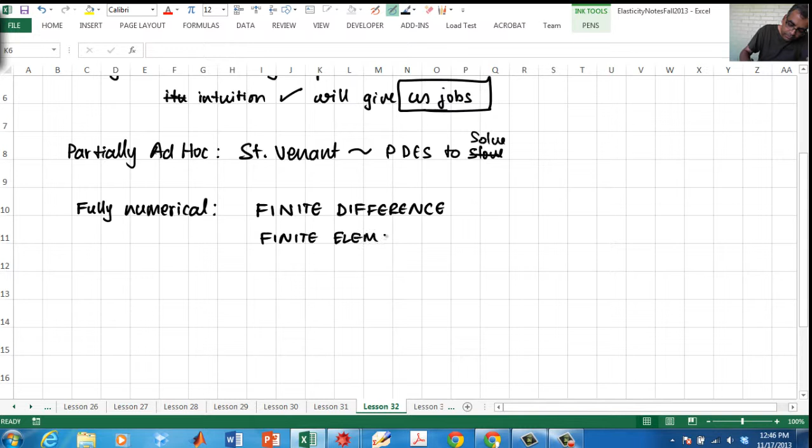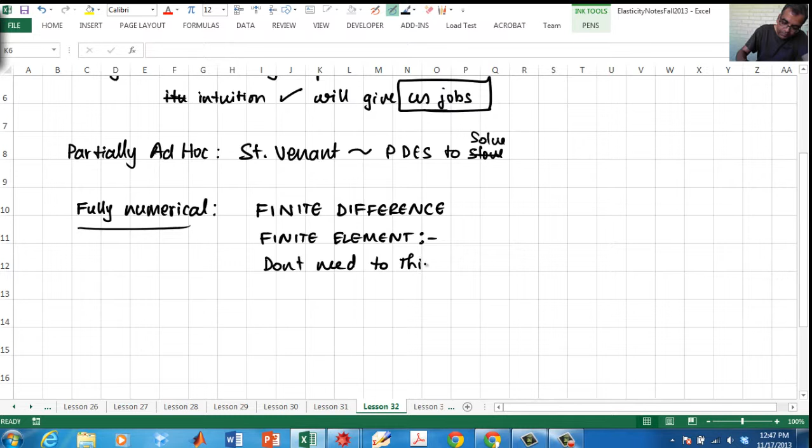etc. So right now we have the hegemony of the finite element scheme to the extent that people actually think that mechanics means finite element. That's actually not true. Okay, finite elements is a small area of mechanics which has some practical use for finding fully numerical solutions. So it has some very good advantages. Don't need to think. Okay, well, it's not really true, but I'm just telling you.

Okay, so what it means is that you are replaceable. And you're hoping that by that you will get promoted. You know what I mean? If you're irreplaceable, you will not be promoted. So it's a bad thing. So my point is, okay, fine.

You know what? If you do a fully finite element method, you think it's magic. You press a button, you get some color pictures, and answers are all fine. But you cannot do parametric studies. So it takes too long. And the answer from many people is to just say, buy a big enough computer. I mean, that's a waste of resources.

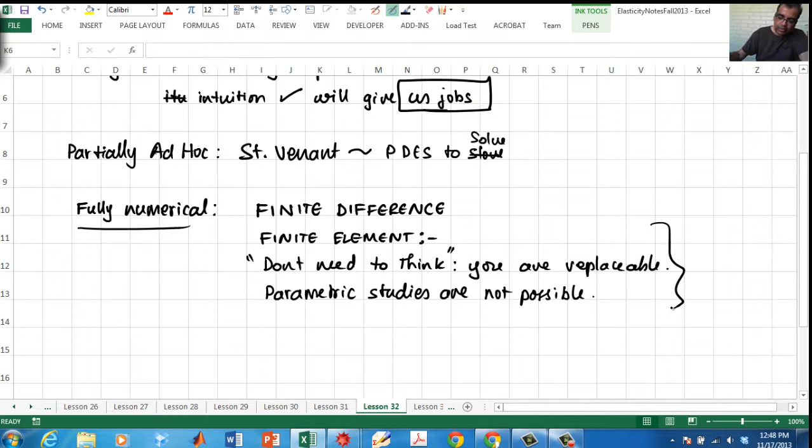And that's again one of those things which at a high level, you have to ask yourself, do you really need it? It's like saying, in order to kill a fly, what I need is a flamethrower. Yes, it will kill a fly, but it will kill also everything else around it. So, you gotta match your tool for the task. Okay, so that's a crazy thing to do. But that's what we are doing right now. So please remember that these kinds of things are fully numerical schemes.

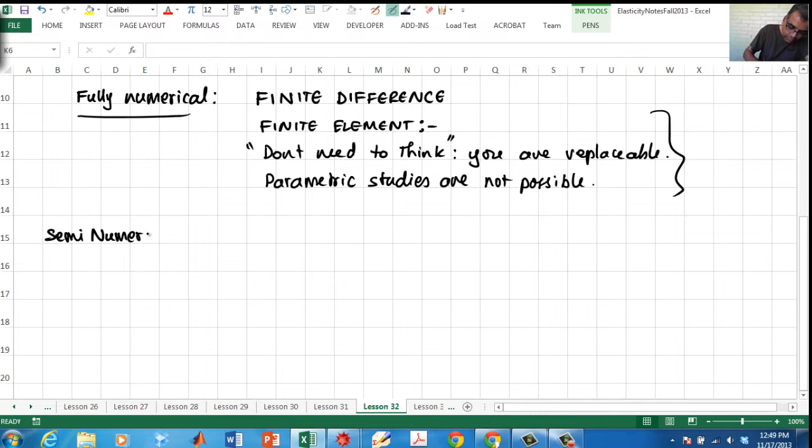Now, there are a whole bunch of things which are called semi-numerical, or semi-analytical. This uses symbolic manipulation plus numerics. This is somewhat new because symbolic manipulators, like Mathematica, Maple and other things, are still being used primarily as small tools in engineering classrooms. We have to use it much larger, and I will show you that symbolic manipulators are very good for doing certain things.

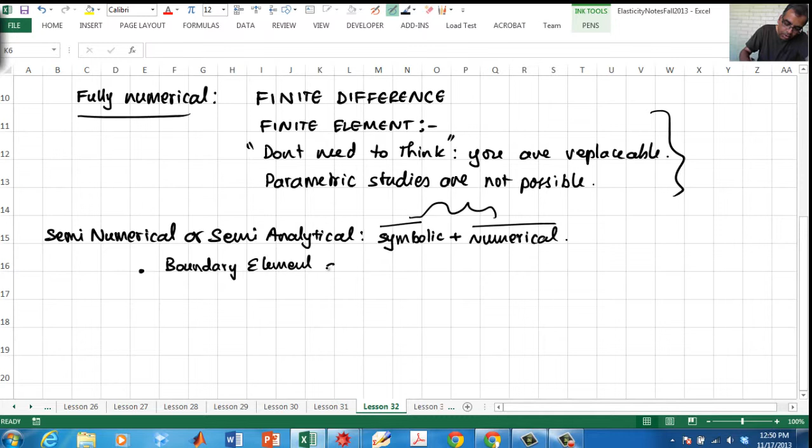But you cannot do everything. It cannot give you exact solutions for everything. People do entirely symbolic or entirely numerical. I am thinking you can do something together. Okay, so there's already one method that does that. These are called boundary element methods, or Green's function methods. And they work by doing exact solution for point load, and then approximating.

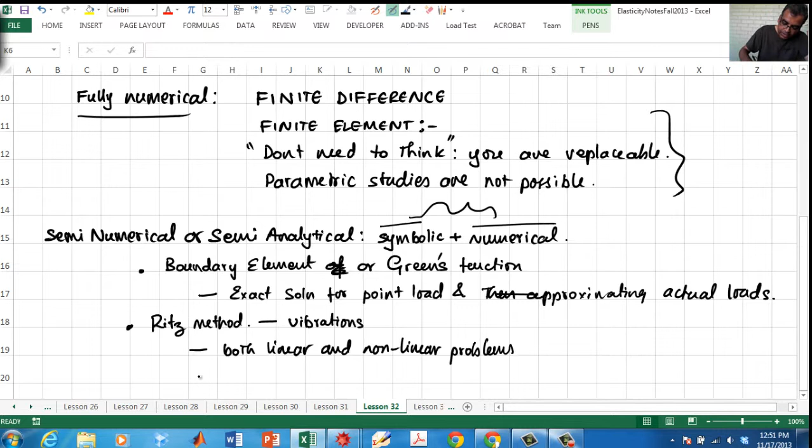So this is one, and the second method, which is what I am going to talk about and which is again very popular, is called the Ritz method. And this is actually very popular in the vibrations community. And this works for both linear and nonlinear problems. This is quite good. The thing is, it requires judgment. And by the way, this method predates finite elements, all of these things. This is a very old method. Many times it's called the Rayleigh-Ritz method.

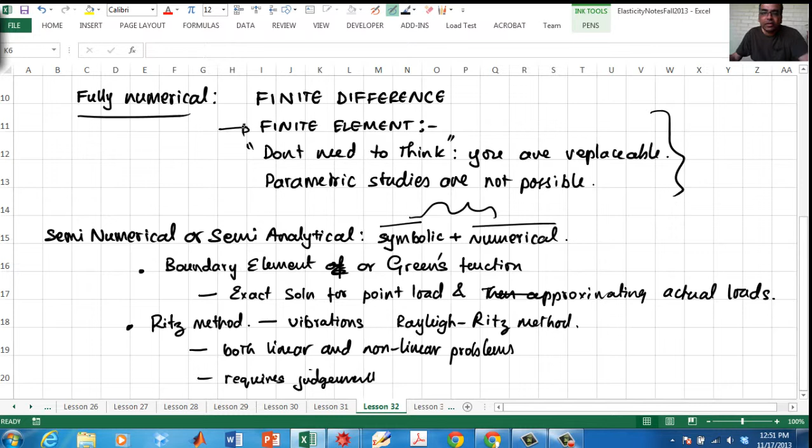And I'm going to show you how to use that, just to introduce you to it, so that you realize, no, not everything needs this. Don't blindly go to this kind of thing. Use your brain so that you can earn your keep. Otherwise what happens is, after a short time, they will say, why are we hiring you? So how does this Ritz method work?

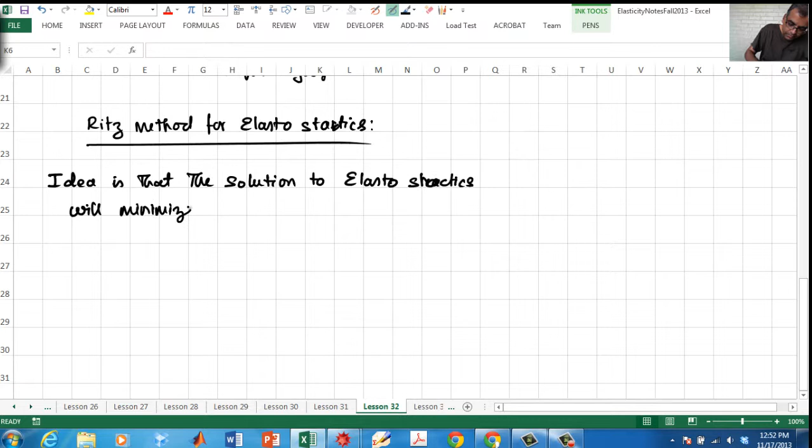So for elastostatics, how does it work? Step 1. Before I do step 1, let me back up a little bit. I want to do something slightly different. The idea is that the solution to elastostatics will minimize the strain energy.

Among all KADs. Remember what's a KAD? Kinematically admissible displacements, right? So what does it mean? Find u_i that minimizes the integral of 1/2 C_ijkl epsilon_ij epsilon_kl over the whole body, minus the integral over the traction boundary, only traction boundary conditions, of T dotted with u dA. Remember this, right? So this was the energy, and find things that minimize this.

That's the idea. So approximate solutions will do an approximate minimum. What do I mean by approximate minimum? We are not going to minimize over all possible KADs, only over a parameterized subset. That's it. What do I mean by this? I'm going to talk about the general procedure, then we'll look at a particular example.

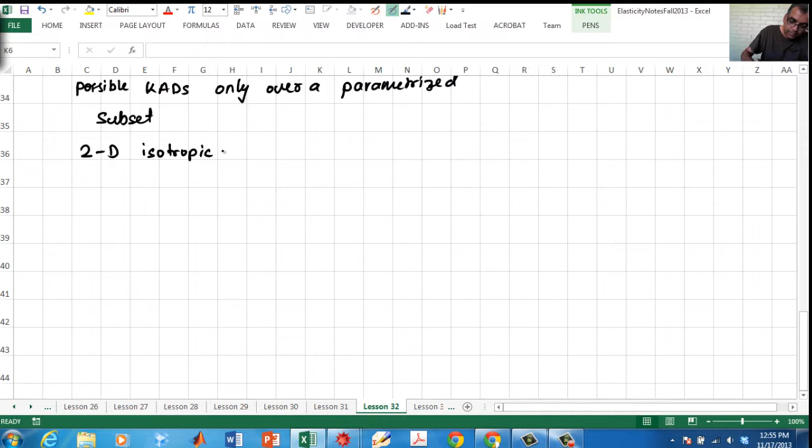Okay, general procedure. So we are going to do 2D isotropic elasticity. The idea is the following: u of x, y equals summation u_i f_i of x, y. These are known functions. v of x, y equals summation v_i g_i of x, y. Again, these are known functions. These are unknown constants.

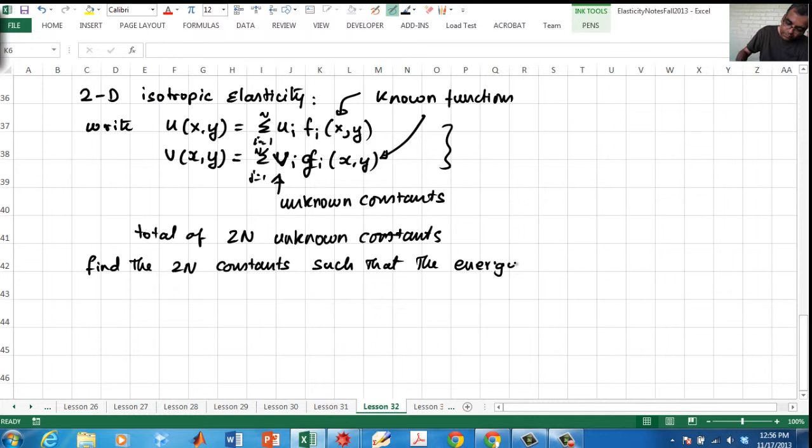So i equal to 1 to n, j equal to 1 to n. So how many unknown constants? A total of 2n unknown constants. So our task is to find the 2n constants such that the energy is minimized. We have to make sure that it has to be KAD. You cannot pick the f_i's to be anything you want. It has to be a kinematically admissible displacement, otherwise it will not work.

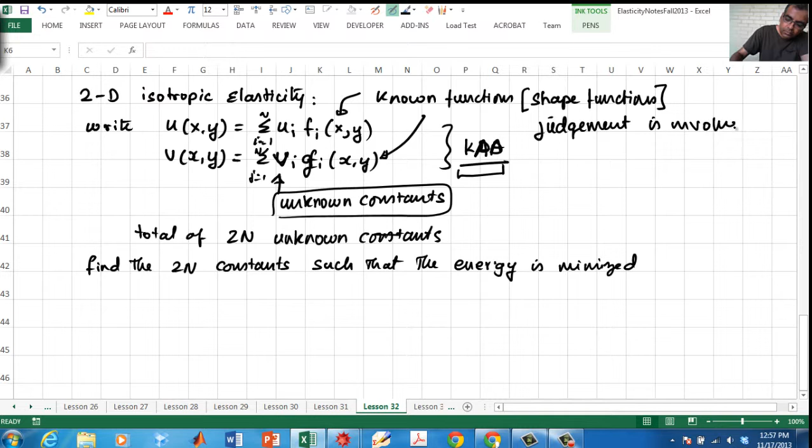So rather than looking at all possible things, we are going to look at only some possible kinematically admissible displacements. These are usually called shape functions. These are known a priori, and there is nothing which says you have to pick polynomials or anything. Pick whatever you like, which you think is reasonable. So judgment is involved. Okay, so how do we do this? I'm going to show by example.

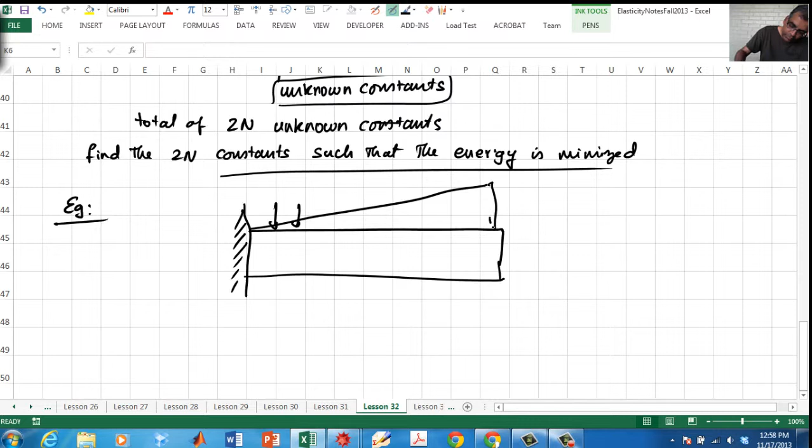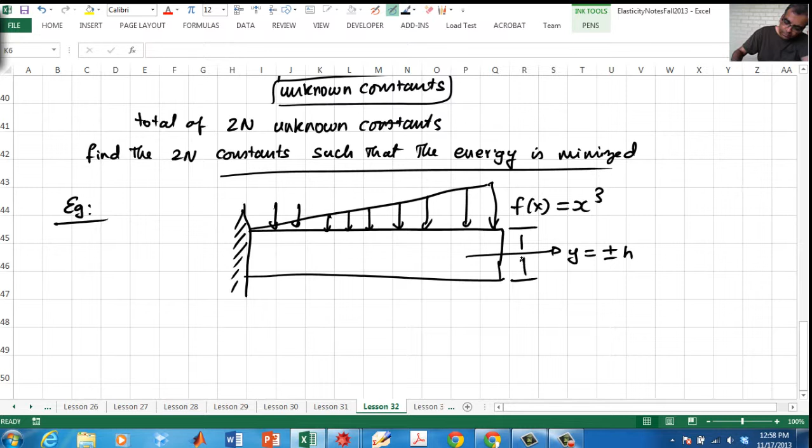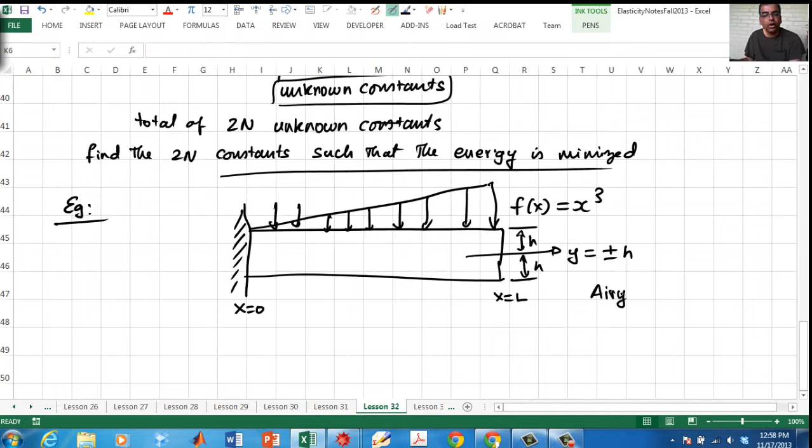I have a cantilever beam, and then I have a force distribution that is cubic, and I want to find out the displacement. y equals plus or minus h, and x equals 0, x equals L. I want to be able to do this symbolically, and this is a square cross section. I can do it by Airy function. We know how to do that, but I don't want to do that. I want to show you how to do approximation.

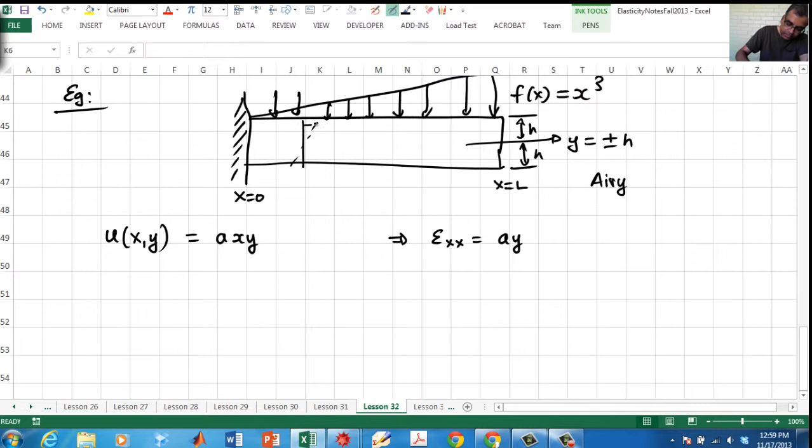So you say, okay, fine, I'm going to assume u of x, y equals a x y. You're wondering, how did I know that? Because this means epsilon_xx is a times y, and I am assuming that the strains are linear. v of x, y equals a0 plus a1 x squared plus a2 x cubed. Sorry, we'll call this a3, a1, a2.

So notice this. Why did I assume this? Because roughly speaking, if I have a cantilever beam, I will get a cubic dependence. PL cubed over 3EI is the deflection, and also I am assuming no variation in the y deflection through the thickness. If you say, oh my goodness, how am I going to do it? Well, this is what you get paid for, my friends. The ability to come up with ideas, pictures for these things. So this is a good assumption based on cantilever beams.

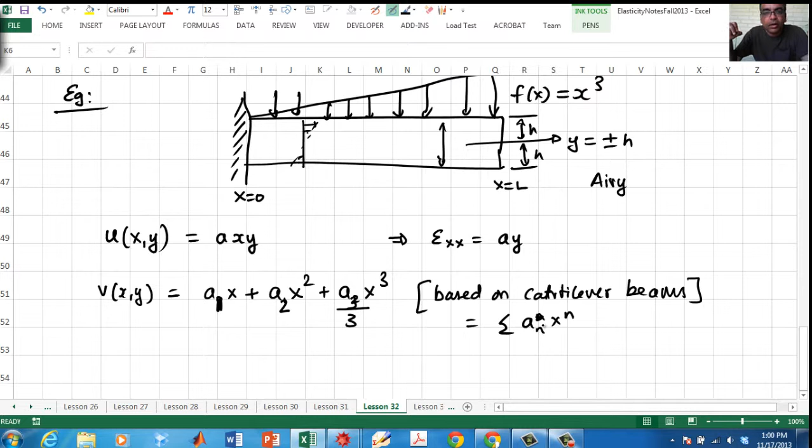You can do something else. I mean, there's nothing, for example, you can do, okay, fine, I don't know what to do. I'll put an x to the n and put n equal to 1 to 7 or 1 to 5 or whatever you want. I'll tell you a little bit later how to pick something a little bit better than this. Okay, right now, so what it is, find these four constants.

So the problem reduces to, instead of finding u of x comma y and v of x comma y, we just need to find a, a1, a2, a3. These four constants. Okay, and I'm going to make my life a little bit easier also. So that's step one. So this is my assumption.

This is the f of x comma y. These three things are the g of x comma y, the shape functions. Roughly speaking, the shape is determined by those functions. So if you pick different shapes, I'll get different possible shapes for the beam. That's how it works. And there are only four constants. Now what I want to do is to say, given these four constants, let us calculate the strain.

Epsilon 11 is du dx, which turns out to be a times y. Epsilon 22 equal to dv dy, which turns out to be 0, right? Because there is no function of y. Epsilon 12 equal to 1 half du dy plus dv dx. So let's do it that way.

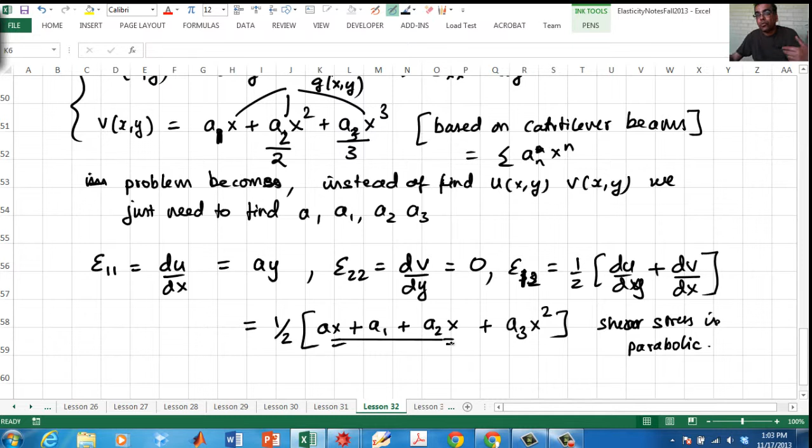So I want to get rid of the x term. You don't have to do it, but I don't want to do a lot of calculation. What I'm trying to tell you is, the more insight you have about stress distributions, the better you will get at picking the functions and simplifying your life. In this particular case, I'm going to say, a plus a2 times x term, I want it to be 0, so that it's only parabolic. You can see a1 and a3x squared.

Let's not take it too seriously, you know what I mean? This is a crude idea. So what happens is I will get a2 equal to minus a. So I got rid of at least one of the constants. So I got a2, a3. Okay. So next, I want to calculate the strain energy.

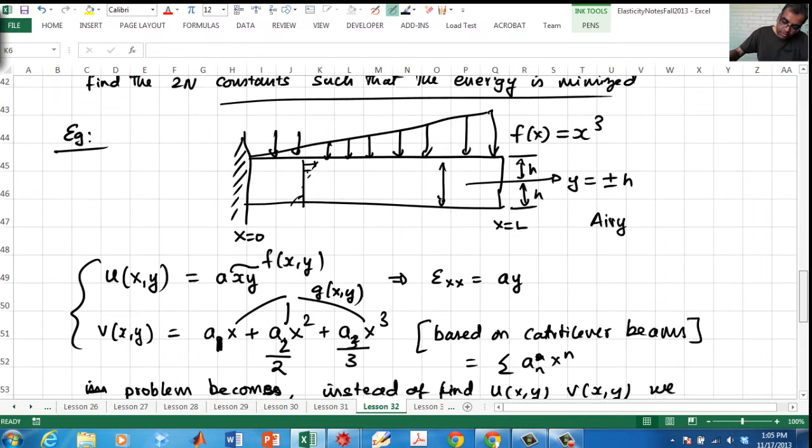U equals integral, if you remember, 1/2 lambda epsilon ii epsilon kk plus 2 mu epsilon ij epsilon ij dx dy. So this is a double integral, goes from minus h to h, 0 to L, minus the boundary integral. So remember, that's only this. f of x there is x cubed, so I'm going to put minus x cubed, and then v of x comma h dx. So y is h.

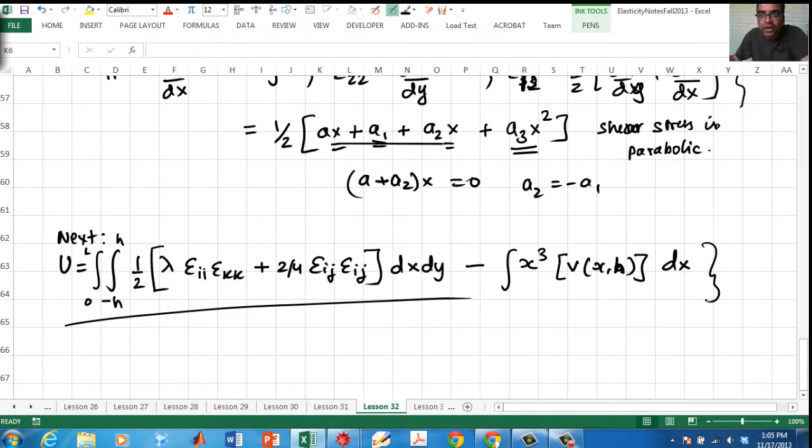Okay, now you have to do this, and this is a pain. Even calculating these things is a pain, and then it starts really getting painful here. This integral, if you use simple enough functions, you can actually do using Mathematica or something, which is what I am going to do. I am going to show you what it will look like if I use Mathematica for this. Okay, let's see. I'm going to shrink it so that both of them can fit.

Okay, so I'm going to shrink it here. I'm going to show you the Mathematica side of it. Okay, first thing I do is I have u and v. u is a times xy, v is a1 x minus a2 over 2 x squared. I mean a, because a2 was minus a, so it is minus a over 2 x squared plus a3 over 3 x cubed. So the constants are this, this, and this. So there are only 3 unknowns. I have to get 3 equations. So we'll see how it goes.

So I'm going to say shift enter. So now I have plugged in u and v. Now look, strain epsilon 11 is du/dx, epsilon 22 is dv/dy, epsilon 12 is 1/2 du/dy plus dv/dx. Okay, and the energy is 1/2 lambda times epsilon 11 plus epsilon 22 squared, that is this term, epsilon ii epsilon kk, plus 2 mu times epsilon 11 squared plus epsilon 22 squared plus epsilon 12 squared. Sorry, there should be a 2 here because there are both epsilon 12 and epsilon 21. Okay, so let's see what we'll get.

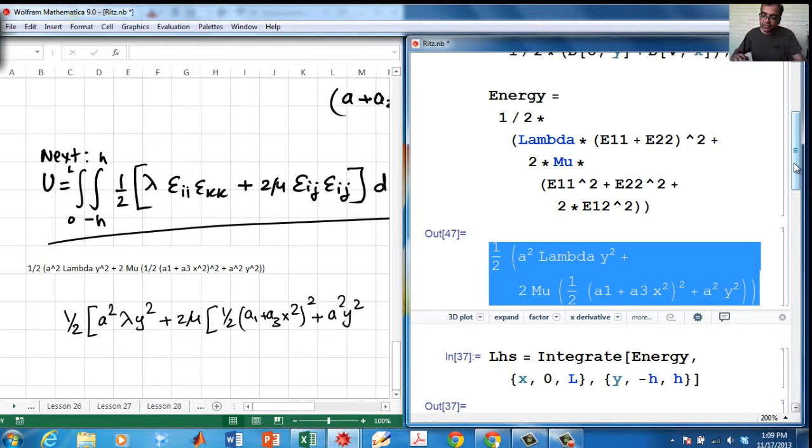Okay, so now what I want to do is integrate this thing. There, left hand side is integrate the energy from x equal to 0 to L and y equal to minus h to h. So I am doing this thing. Okay, so off we go. I'm going to go up here and I'm going to say, there you go. I got a messy thing, but that's okay. Okay, so I'm going to write this.

Let's see. 1 over 15 hL times 15 a1 squared plus 10 a1 a3 L squared plus 3 a3 squared L fourth. I'm just writing it down. You don't have to do it. I'm just showing you what you will get. Okay. That whole thing times mu plus 5 a squared h squared times lambda plus 2 mu. That's the energy. This thing, U. And I'm calling it the LHS because I'm going to soon show you what happens.

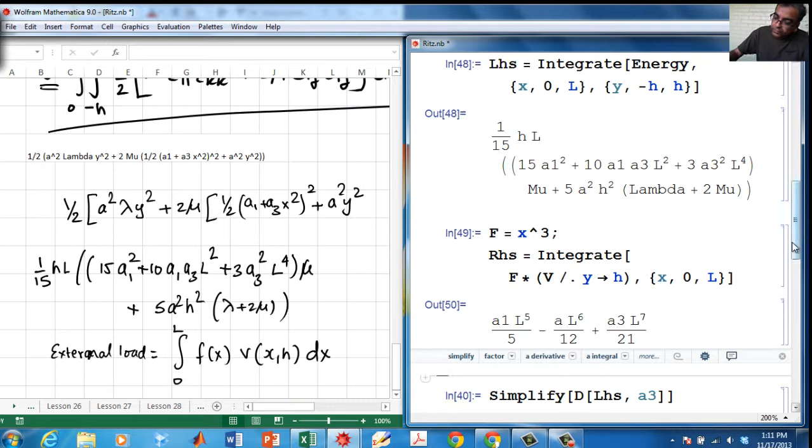So if I do that, I will get there. So this whole thing turns out to be a1 L to the 5 over 5 minus a L to the 6 over 12 plus a3 L to the 7 over 21. So what is my energy now? Total energy U, which is a function of a1, a2, sorry, there is no a2, a and a3. These are the three things, right? Equals all this junk 1 over 15 hL times all this junk minus a1 L to the 5 over 5 minus a L to the 6 over 12 plus a3 L to the 7 over 21. Notice, instead of being a function of ux and uy, it's now a function of just three variables.

Now I want to say find a1, a, a3 that minimizes U. How do I do that? I do partial U with respect to a1 equal to 0, which means this. So let's go up here and I want to say there are two pieces. I have to do this and that. I am going to do both of them. a1, a1. There, it tells me. Of course I could have done that by hand, no? But I'm just going to show you.

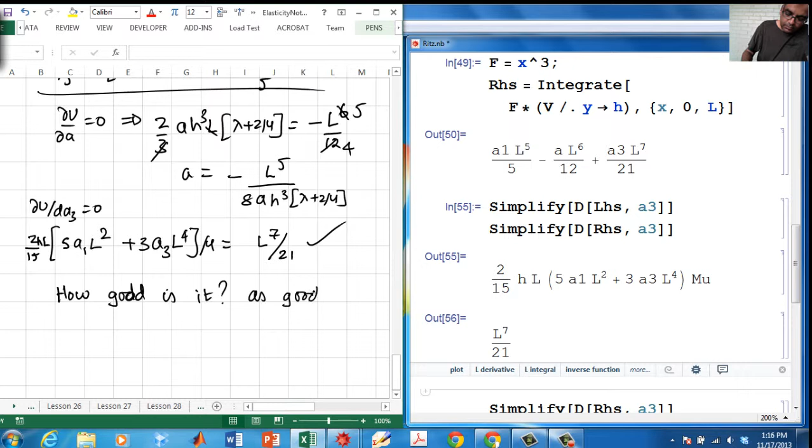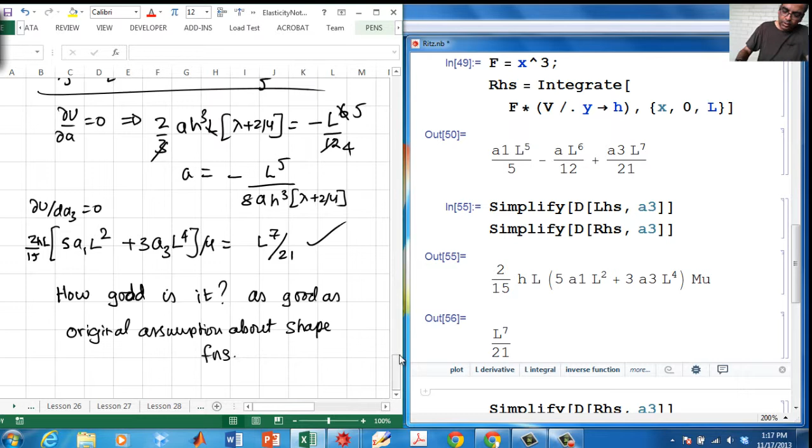How good is it? It is as good as the original assumption about shape functions. What do I mean? Everything depends upon this. So if this is a reasonable approximation and you have enough flexible parameters, you will get a good solution. By the way, it will always overestimate the stiffness.

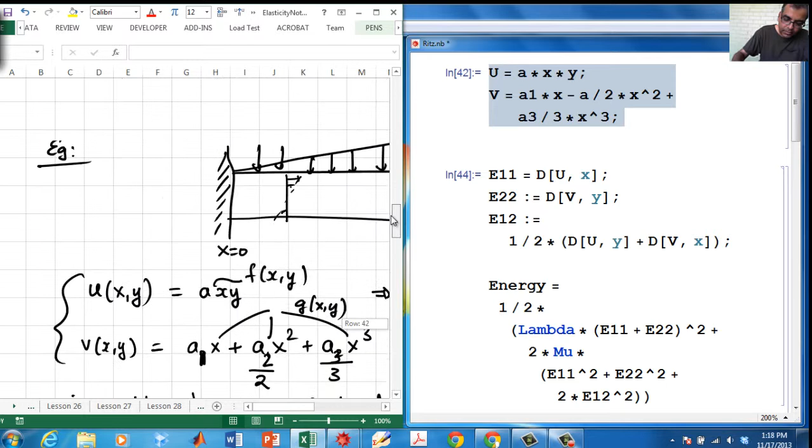The actual beam will be more flexible than this, because in this case the assumptions always restrict flexibility. What do I mean by that? So if you go back to our idea, okay, the original statement, so we are done with this, so let's go back here.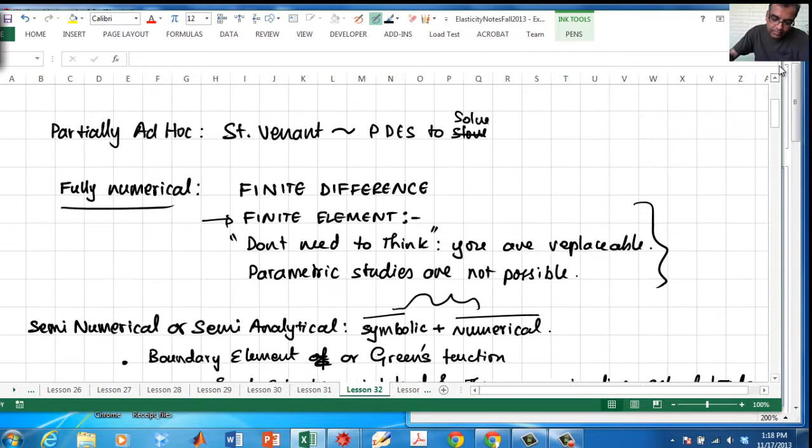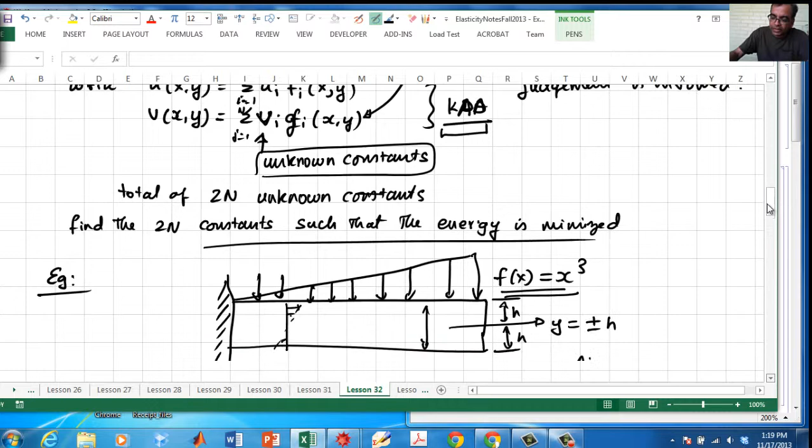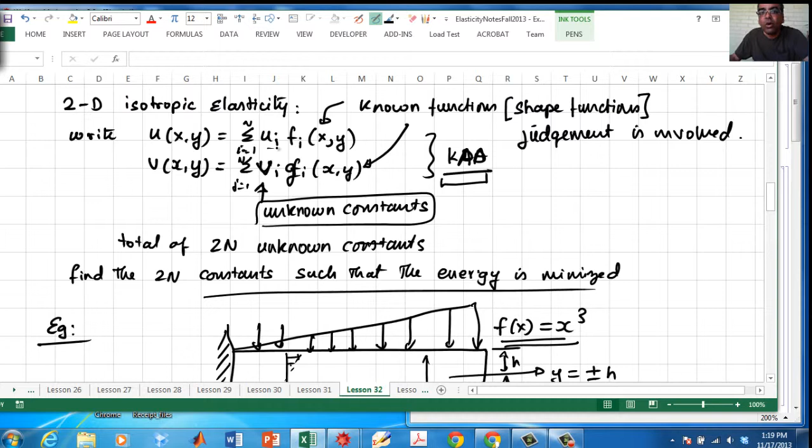Okay, the original actual minimization problem is this. The actual minimization problem is among all kinematically admissible displacements. So it allows the beam to be very flexible as long as it meets the boundary. But our solution here was much more restricted than that, because we allowed only for certain kinds of deformations. So the actual beam will always be more flexible. So the stresses that we get will always be higher. So this always gives you upper bound for stresses.

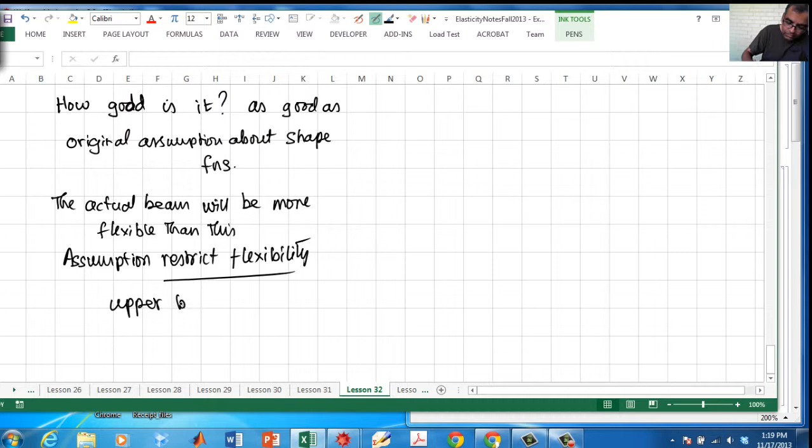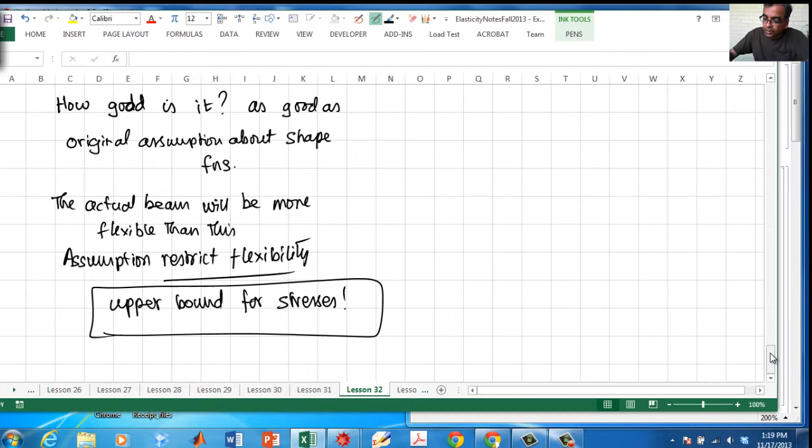It gives us upper bound for stresses. That's what happens. Okay, but I got the method, right? So the method consists of assuming, so let's go back and make sure. The method consists of assuming some nice forms for u and v in 2D and u, v and w in 3D. What form you assume is based on your intuition. So this is where your intuition plays a role.

Calculating the strains, calculating the displacements, integrating the strains out, and carrying out this integral, and then differentiating. The result will always be a function of the parameters a1, a2, a3, whatever. Differentiate it with respect to the parameters, set it equal to 0 because that's the minimum condition, and you will find algebraic equations. The thing is, there are two steps where you might have to do approximation.

First step is here. You may have to do this integral numerically. When you do that, you will lose the parameterization, but you will have to try and see how much of it you really need numerically, how much of it you can do analytically. So don't just blindly do numerical integration. Sometimes you may have to do numerical integration only along the y direction and not along the x. That's okay, so that you can get this one.

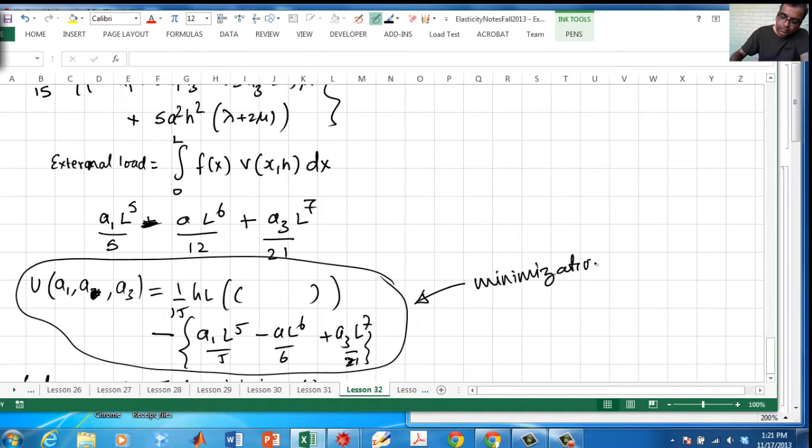The second one is solving these algebraic equations. That's actually not a hard problem. In fact, in many cases, you don't even have to solve the algebraic equations. You can go right up here and use a minimization technique. There are a number of these things which allow you to find the minimum of functions. That's the other way to go.

Right? So this is a different idea. You don't even have to do the differentiation. And it can be entirely automated. Everything depends upon your shape functions. Finite element methods also do the same thing, except that they pick lots and lots of shape functions irrespective of the problem. Okay, so that's the idea. Thank you.